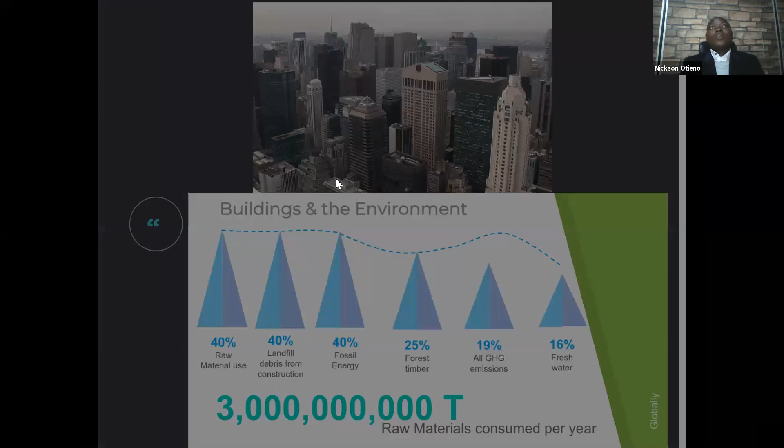And one of the sectors in which we need radical thinking and transformation is the area of design and construction of our built environment. Yet, the reality is that in many parts of the world, architecture still continues to contribute to the social and environmental challenges we are facing rather than offering the solution. The way that our buildings are being designed, constructed, and even operated and demolished has continued to increase this depletion of resources. So we have the building sector extracting more and more materials from the environment and contributing a lot of waste. And these wastes, of course, end up polluting our ecosystems and our environment.

And on the other hand, especially in the developing countries where we still have many poor families, we have buildings that do not have basic services to guarantee the comfort of the residents. So for example, in Kenya, you have many families that are still living in houses that do not have electricity, that lack basic water for their needs. They don't have proper sanitation. While on the other hand, we have a lot of water being wasted, in terms of rainfall that is not harvested so that it can be properly used.

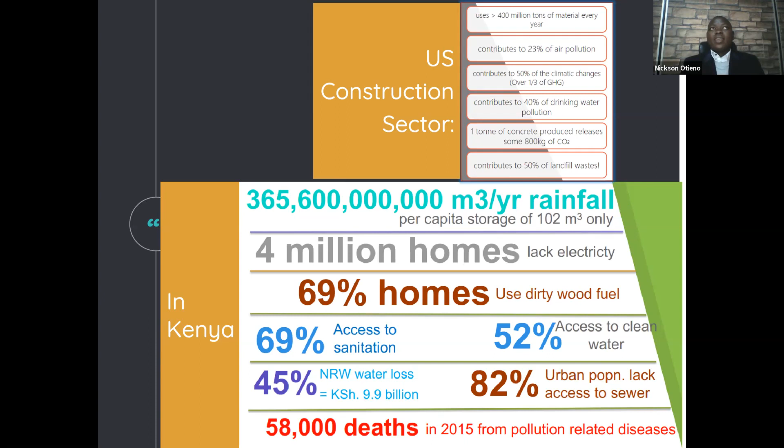And so we have a lot of people dying. In Kenya, we have 58,000 deaths occurring every year because of pollution, largely because of the poorly designed built environment that we are living in. Now, this tells us that we need to shift how our buildings are designed. And this vision of transformation could be called sustainable design or sustainable architecture.

So what is sustainable architecture? Sustainable architecture is the kind of architecture that creates buildings that solve the environmental and social challenges that we have just referred to. These are buildings that take less from the environment while offering more to the people that use them. They are buildings that heal our hearts, that heal our earth, and heal our populations. So how can we design, construct, and live in buildings that heal our earth? I invite us to consider 5 questions or 5 principles on how we design, construct, and operate our buildings. These questions are the why, the what, the where, who, and when, and how of design and construction of buildings.

It is important that we begin to reevaluate the purpose of our building design and construction process. We need to change the thinking that only focuses on generation of profit to have a balance of the social and environmental issues in our design. We need to begin looking at our buildings as part of a larger ecosystem, as part of a larger neighborhood, rather than being only a single product, a single building for a single client who is interested in very short-term goals without considering the larger community, the larger ecosystem in which these buildings fit.

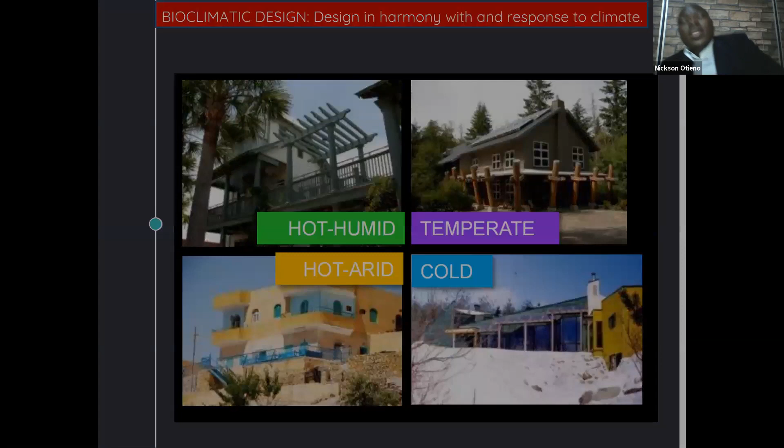So we need to look at buildings that are using more and more of the natural available energy, the natural resources that the planet offers us. We don't necessarily need to be thinking of highly mechanized buildings where we have to use air conditioners, we have to draw more of fossil energy to be able to run our buildings.

But we need to take advantage of the natural light, the natural sun, the wind, the flow of energy that we get freely from the environment. And indeed, this is what our predecessors used to do. We had people living in the most extremes of environment, in the desert, the very dry, arid parts of this world. They were able to conceive buildings that were able to protect them from the harsh elements of the hot sun and the sandstorms.

We had the people who were living in the very extremes of the temperate climates able to develop buildings that could protect them from the extreme cold. But how come today, with all the knowledge that we have, the technology that we have, we only rely on very active systems that are extracting more material, extracting a lot of energy based on fossil fuels, to keep our buildings warm when the environment is cold, and to keep our buildings cool when it is hot.

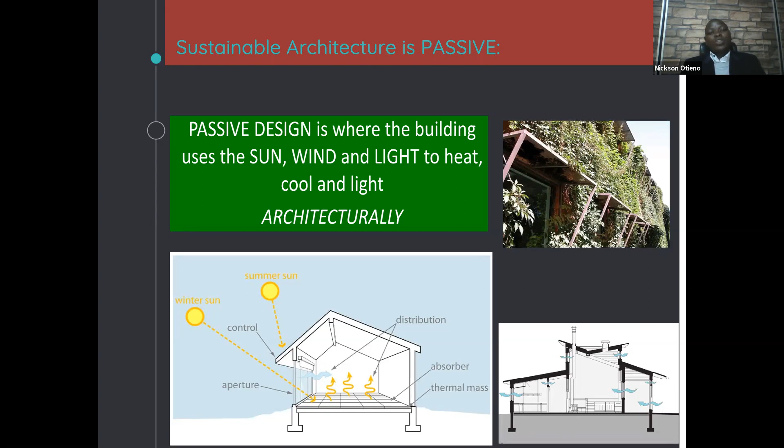We need to take advantage of passive systems for natural lighting, for ventilation, and for cooling and heating of our buildings, so that we have minimum impact on the ecological systems that we so depend on. And secondly, we need also to design our buildings to be regenerative, so that we reduce pollution, we design out waste, either by thinking of how we can easily disassemble the parts of the building, borrowing from the natural system, actually mimicking nature, where wastes from one part of a process become the raw material for the next process, so that our buildings operate in cycles.

So in biological terms, we could look at natural bio-based materials that, once the building lifespan ends, go back to the ground, and we restore them. And I think the basic material of that kind is the earth that we've been building with since time immemorial. In many parts of the world, the larger population of people are still living in earth houses. But we have made these people feel that these houses are archaic and rudimentary, that they need to abandon them and embrace highly industrialized materials that have a large ecological footprint. So we need to embrace those natural systems.

And we need also to think of how we can dismantle our buildings. How come we can easily assemble and disassemble a car, but we cannot easily assemble and disassemble a building? So if I design an apartment today, and 20 years down the line the realities of that time are such that apartments are not the best type of building for that geographical setup, I should have the flexibility to adjust the spaces within my building, to remodel it in an easy way with low environmental footprint, to make it fit for the purpose of that time. These are some of the principles we need to consider in the new kind of architecture that we call sustainable architecture, which is responsive to the realities of our time.

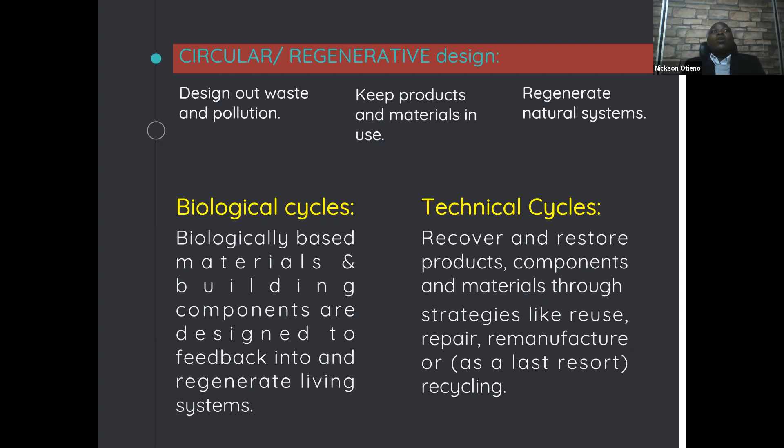The other area that we also need to pay attention to is the materials that we use in our construction. I want to dwell much more on this. Currently, we are building with highly specialized, highly engineered materials, in many cases drawn over very long distances. There's more and more effort to abandon materials that have a low footprint in terms of ecological footprint, greenhouse gas emissions, and even social contributions to the regeneration of the local economy, creating jobs and opportunities, especially for those who don't have jobs. So for us to have a sustainable architecture, we also need sustainable materials applied in the construction of the buildings that we put up.

And these materials are those that are locally sourced, so that we don't depend on long distances, extracting raw materials from far lands and shipping them to another distant part of the world, sometimes probably China. And then we ship the refined and processed material back, for example, to Africa or whichever part of the world to put up our building, while we could have actually sourced those materials, remodeled them and used them within that site.

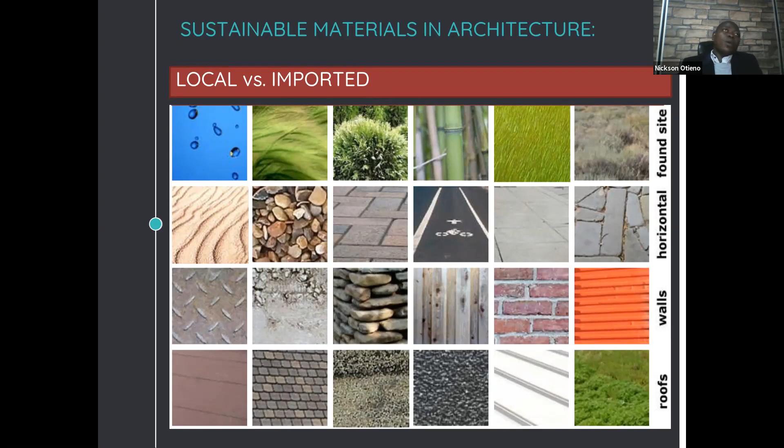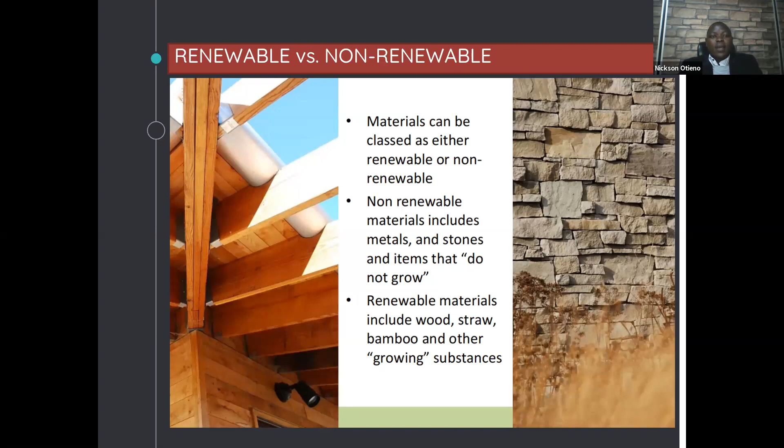So we need to promote use of locally sourced materials as much as it's practically possible. Secondly, the materials need to be more renewable rather than non-renewable. We need to encourage the use of materials that can easily be taken back into reuse to promote the circular thinking, as I've already discussed earlier. We also need to use materials that have higher recycled content, materials that are reused and repurposed.

So for example, if, rather than demolish buildings, we just dismantle them carefully and recover the materials that were used in an old project for a new construction project, we would be able to prevent the need for further extraction of virgin materials, which actually disturbs the ecological setups where those materials are sourced from. We need to move more to a scenario of reuse within the building and construction sector.

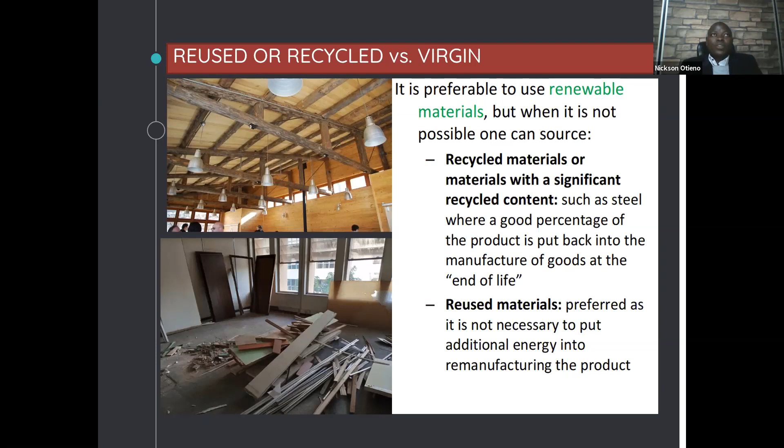And we also need to design buildings that are more durable. Recall the scenario I've given where we have structures that have lasted over 1,000 years, yet some of our current buildings cannot even last 150 years. So we need to design not only the entire building to last long, but also have building components that are designed to be more durable.

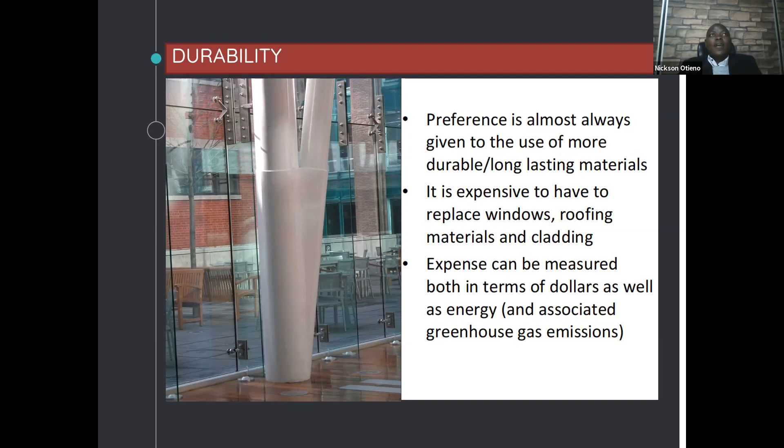Why do we have to be designing, for example, lighting fixtures which have to be replaced every other 5 years as we keep on extracting materials? Of course, the reason might be to sustain some people's profit. Then we need to challenge the industry to think of how they can have sustainable income, sustainable revenues, without creating materials that have to be replaced every other day. So we need to probably think of different business models around the material supply industry. Also, we need to have more and more examples of truly sustainable architecture out there.

And to this end, I would like to share in the next part of this presentation how myself, Nickson, and the team with which I'm working are trying to put these principles into practice in my local context within Kenya. So allow me to lead you through the practice that we are developing, which would embody the spirit of sustainable design, rethinking architecture to be responsive.

We have a vision to create a practice that responds to 3 issues: circularity, promoting natural materials which are also renewable and fit very well within their local context, and the use of technologies and promoting projects that contribute to social community regeneration and social inclusion, building more socially inclusive societies. So we're not looking only at architecture that is for the few, but at architecture that benefits the majority of the society.

To understand this issue of social exclusion, for example, I would like to present a case of school infrastructure. We have a clear understanding that access to education is a basic right that is enshrined in every constitution. It is a universal basic human right. Yet in many parts of the developing countries and in many parts of Africa, Kenya included, the basic infrastructure for learning is so poor. Take the case of Kenya, where we don't have adequate classrooms.

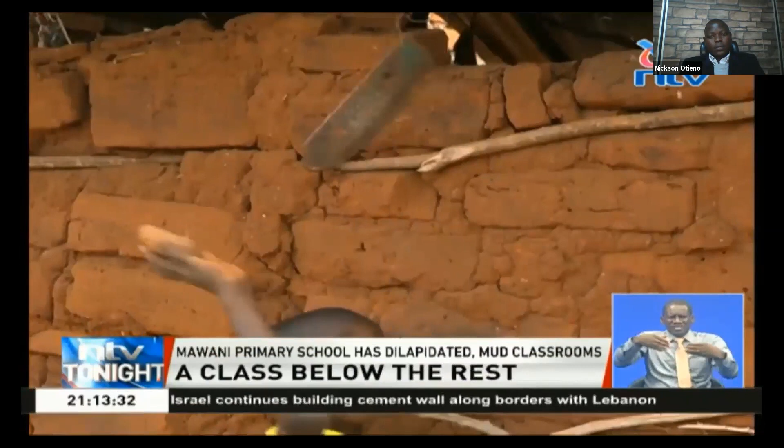This is not a picture of an abandoned house or classroom, much as it may look like it. These are the dilapidated Mawani Primary School classes in Kilome sub-county of Makueni, where knowledge is disseminated. Makueni is characteristically hot, but the space between the barely mud-thatched walls and the creaky roofing is not at all for air conditioning. If anything, the wind blowing through can present health problems. On the other extreme, being a rainy season, the teachers and pupils are drenched in worry because when it rains here, it pours.

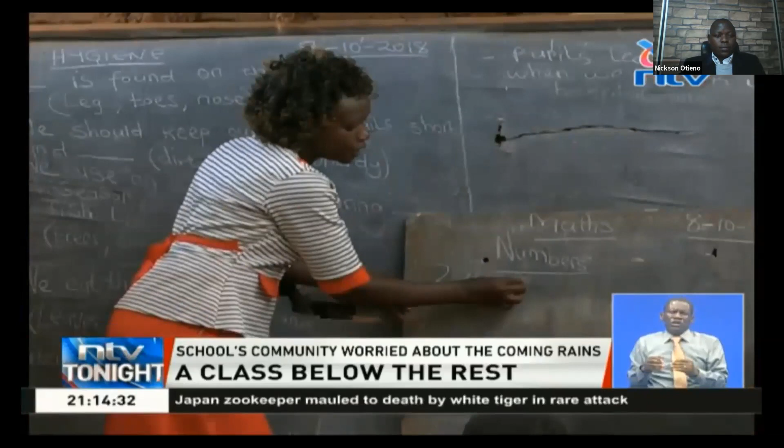These run-down toilets at the Kiambogo Primary School paint an apt picture of the school's crumbling shame. It's a delicate balancing act, a risky venture anytime one heeds the call of nature. Now having to share the 3 latrines takes up much of their class time. The situation in the classrooms is no different. These threadbare walls are barely enough to keep the cold at bay.

While these toilet structures are falling apart, the pupils here are taking the suffering for it, at risk of contracting diseases and with nowhere to relieve themselves. These pit latrines have now lost their purpose and are a pitfall, a ticking time bomb. And this is Lord Watum Primary School, one of over 200 public primary schools in the vast county.

That is just a brief of what has been covered in our media, and the scenario really is bad for many schools. And the reason, of course, partly is issues to do with budgetary allocations, but it's also because of the current architectural practice that makes it so difficult for the communities and the government to be able to develop these facilities at a rate that can respond to the need that these communities have. So what are we doing about this? Of course, we have 2 approaches.

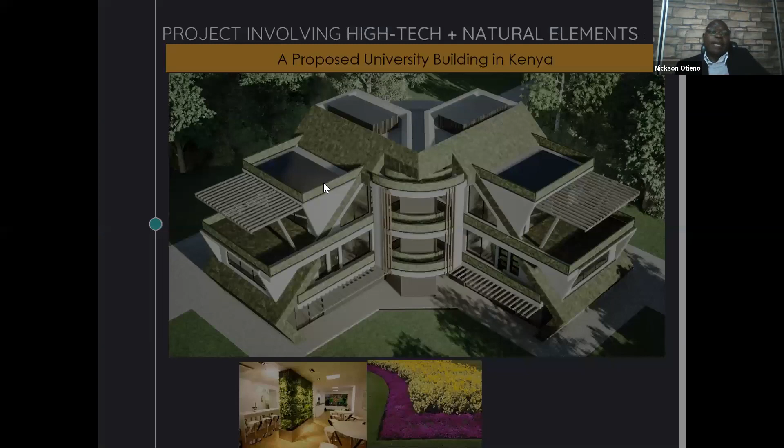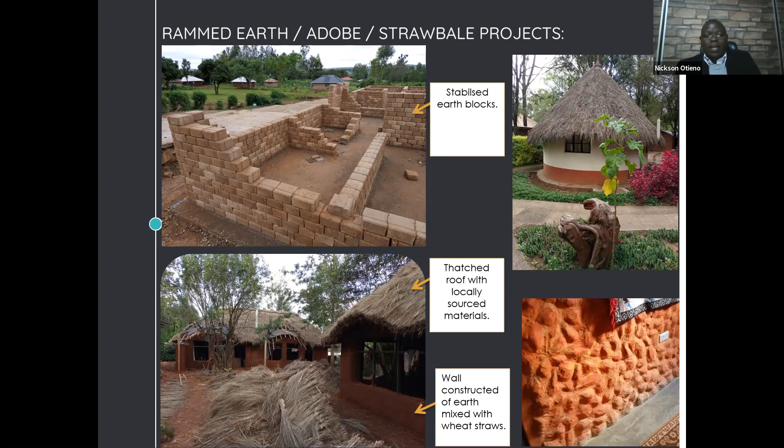We want to look at how we can integrate these traditionally tested methods of construction with modern techniques with design to make them very functional and very aesthetically appealing infrastructure for different setups, both for private clients, but also for public spaces, especially the communities that are not able to mobilize a lot of resources to build expensive buildings for what they need, whether it is infrastructure for school or whether it is the healthcare facilities.

And of course, COVID-19 has actually shown us the importance of investing in more healthcare infrastructure. But the reality for Africa, and Kenya included, is that we still have many hospital facilities that are largely lacking in terms of the basic infrastructure.

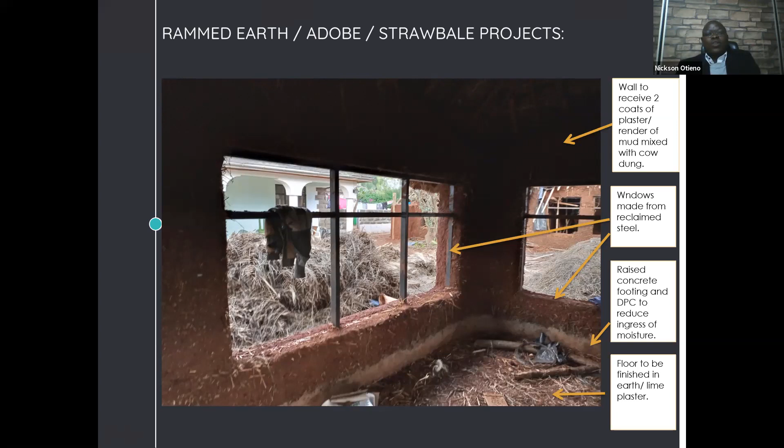So we really hope that use of such natural systems, natural materials that are readily available, employing the redundant labor. Africa has a huge problem of labor. We don't need to import many of the materials, prefabricated walls from China, from different other parts of the world, and exclude the people who could have worked actually on construction of this wall with readily available material. So those are some of the things that we are looking at.

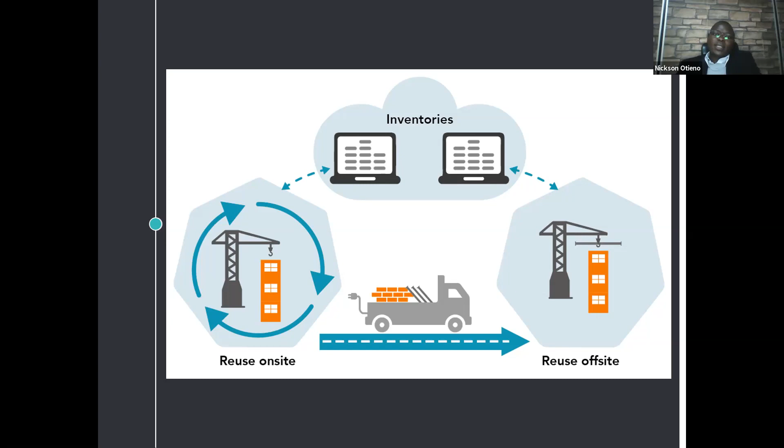And besides that, we are also activating reuse within the construction sector. So we have realized that this is an industry that also produces a lot of waste in terms of materials, with almost 15% of the materials that are taken to every site ending up being dumped as waste. So to really deal with that waste of materials, we have created a digital platform where people can share the waste materials that are generated from their sites, and people can post, and others can buy those materials, or they can donate these materials to community regeneration projects.

And I invite you to visit our website. It is endelevu.co.ke. You'll be able to see already the pilot community regeneration projects that we are doing, rebuilding schools, classrooms, improving on walls for healthcare facilities using materials that have been reclaimed from construction sites and existing buildings.

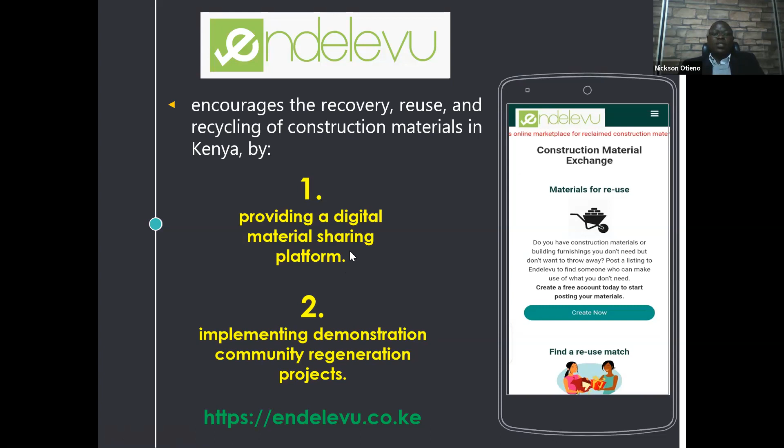And of course, an example of this, particularly what we are doing: at the moment, we have already launched a pilot project that we want to roll out across the country, reclaiming cement bags from our construction sites and using these cement bags to construct earth walls.

So just to give you a picture of the scenario, Kenya produces over 84 million bags of cement every year. From our research, we realized that if we were to reclaim all these cement bags and refill them with debris from the construction site, we would be able to construct perimeter walls for 2,000 schools every year. And if you can recall the statistics that I gave earlier in the presentation, more than 41% of schools do not have any fences. So we really believe that just by a simple action like reclaiming these used cement bags and the debris generated from the construction site, we would be able to fence those 41% of schools within the next 5 years.

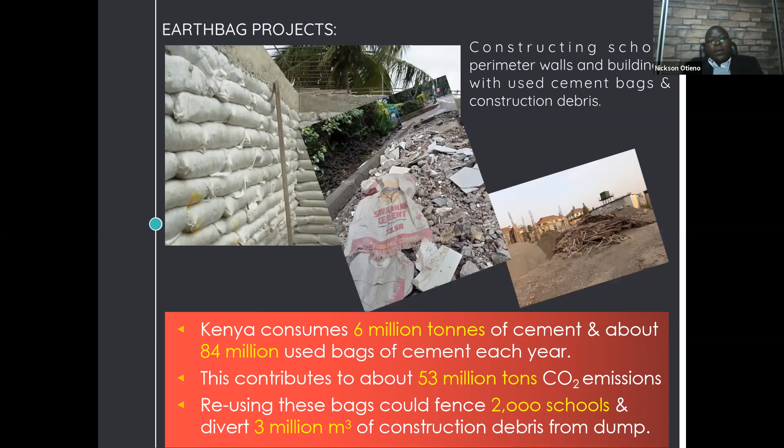We are also demonstrating, working on pilot projects that involve design for deconstruction or for ease of disassembly. So here is a girls' school in some part of Kenya, a boarding girls' school that does not have a library, does not have a dining space, but the school accommodates 1,200 girls every day. So we decided to implement a very simple pilot project that is improving the in-between spaces. Of course, the school also has a limitation of space in terms of land, because the land size is pretty small.

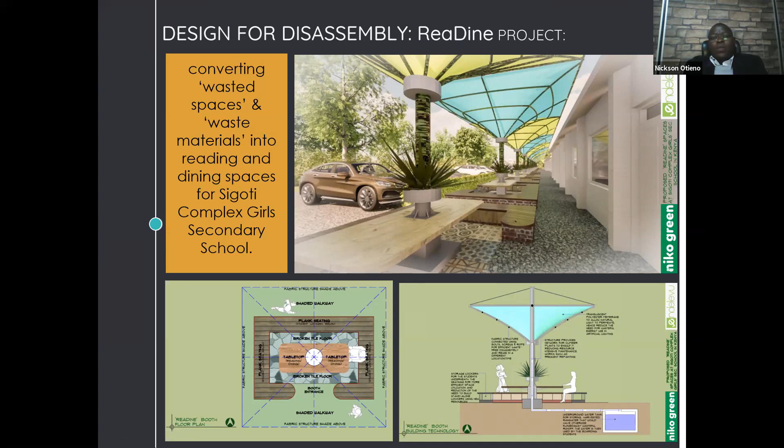So we are mobilizing materials from the waste, from the construction site, for example, off-cut timber, pallets, those wooden blocks, paving blocks, that then we creatively apply in design so that we are able to create better reading spaces. We are using, for example, for the roofing of this space, membranes, plastic materials from large events, the canvases that have been used in events, and then we are repurposing these to form the roofing materials for construction of these multi-purpose reading and dining spaces for these girls, so as to also showcase the importance of circularity in construction.

Now, for many more of those projects, I invite you once again to visit our Endelevu website. You'll be able to find more of such projects that we are doing to showcase the practice of sustainable architecture in our context, not necessarily in other contexts. And I believe such principles could be borrowed, customized and applied in other contexts without just copy pasting blindly, as I had already warned against earlier on.

So in summary, we have shared how we can really transform our architecture to be sustainable, to respond to the environmental and social challenges of our time. From integration of natural materials in our construction process, use of passive design strategies for operating our buildings so that we rely on natural energy. We use more solar energy as much as possible. We also need to install efficient systems where we have to rely on highly engineered systems. We need to integrate nature into the building so as to enhance biodiversity. We need to design our buildings to be more resilient.

We need to design our buildings to take advantage of the resources available in terms of water from the site. We need to be able to reuse the materials and get back the waste from our site. So if it is stormwater, we need to harness it and reuse it, probably in irrigating the plants that we have planted on site. Or if it's the wastewater from our toilets, then we need to harness this and produce energy, probably through biogas or other engineered sanitation systems.

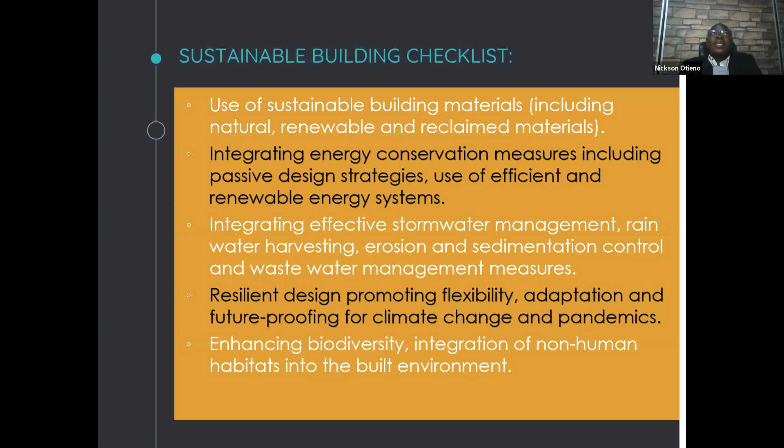And I really want, at this point, to invite us to be part and parcel of championing the transformation of architecture to be more responsive to the issues of our time. How can we do that? We can begin by applying those questions, those principles that we've learned. Ask yourself why, how, when, what, and the people, place, project, all those principles that we have just shared, in your small-scale project. Be part and parcel of the solution by integrating them in your own project, whether in your workplace or your residential house. And you could also join hands with those who are doing community regeneration projects.